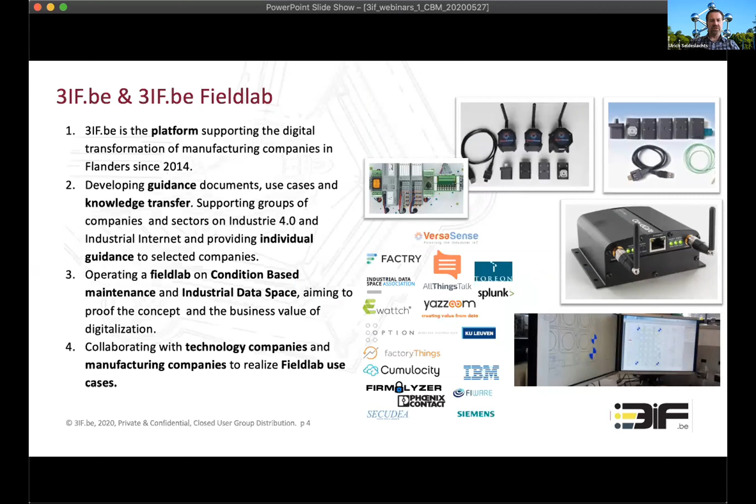The field lab is really a case of components that we take into manufacturing companies to showcase what it can really be about. Within 3if, we don't only focus on condition-based maintenance, but for the sake of today's topic, we'll be doing that. So why is condition-based maintenance important?

We are looking to evolve the whole concept of predictive maintenance and maintenance overall around the concept of Industry 4.0 condition-based maintenance. We are using digital technologies to support digital servitization, to reduce the cost of maintenance and ensure there are KPIs related to those.

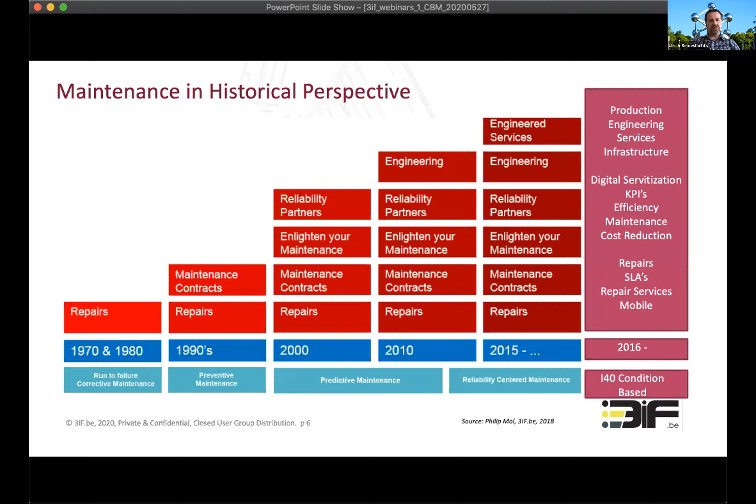We have many different use cases for this that we can show over the next couple of months and weeks. So I'll hand over the word shortly to my colleague Daniel, who's been working together with me on Factory Sense, which uses some similar cases, to briefly explain what we have been doing within Factory Sense. Daniel, I'm going to hand over the word to you.

Good morning to you, by the way. Yes, hello, good morning to everybody. Thanks a lot for participating in this webinar series. I will try to show you a bit of our project.

I will start to share my screen. Hope it works. Okay, I hope that is visible. Yeah, we can see it.

This is a project started from our field lab activity where we tried to put together a few producers of IoT devices, connecting each one to its own IoT platform, to be able to have an overview of what happens at the factory level.

The target for this project is the small and medium-sized company, not only, but the goal was to have something available at an affordable cost to be implemented in real industry.

In the Factory Sense project, we proposed to provide a sensor kit - 10 sensors, one gateway. The gateway is the connection to the cloud, but the 10 sensors can also be an interface connecting the real data from the machines, from existing sensors, to have a look into the cloud and see what happens.

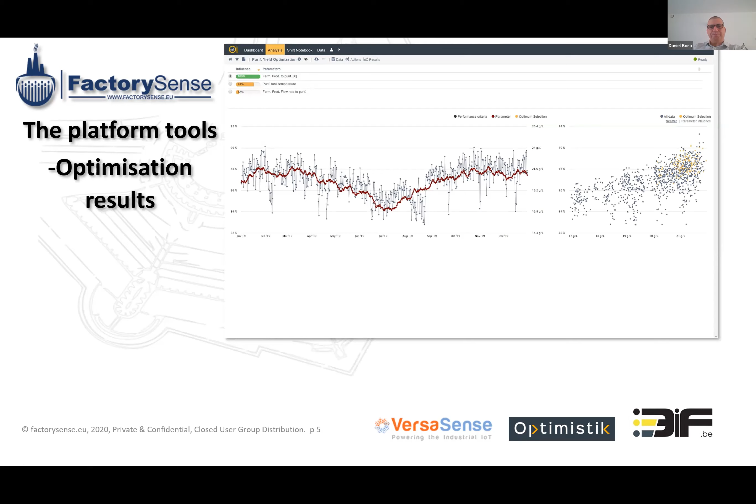So we can rerun the analyze to provide the optimization result. Here is a visualization of the results. Between the data, it's much better here. Between the real data collected, in yellow, we have the best situation, the best settings.

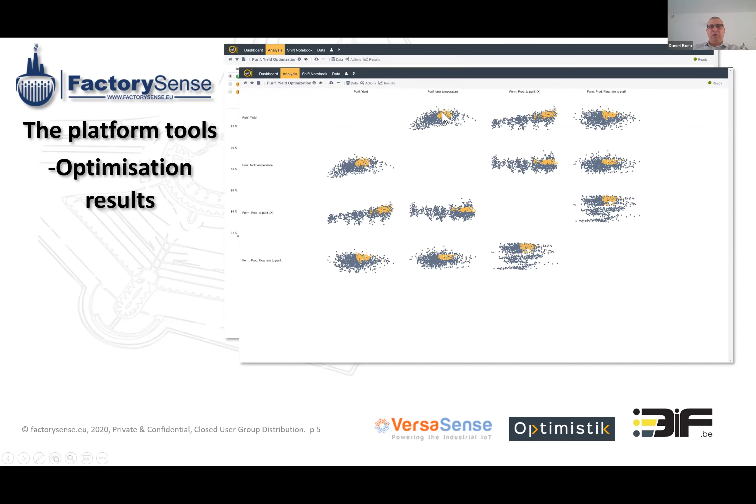And if we go back to the parameters and modify the input parameter, we'll concentrate our output in the best scenario. And another visualization from these tools - I will spend some time here.

It's not related to condition-based maintenance, but it's visible, the variation of some parameters. If here, in place of the tank temperature and concentration in oxygen, we have a vibration or a temperature, we can combine it in only one visualization.

We can combine data from different sensors, and also we can trigger different conditions. Let's say if we have monitored the temperature of the device, probably of a motor, we have some parameters.

We have the motor temperature even in the automation layer. And it's not relevant if my temperature remains at 70 degrees - let's say it's constant, it's okay. But if the increasing time for this temperature is faster than, let's say, a few seconds, that could be an alarm.

In this platform, we can monitor and put together existing sensors, but also we can put calculated sensors to have a relationship between the data coming from the machine.

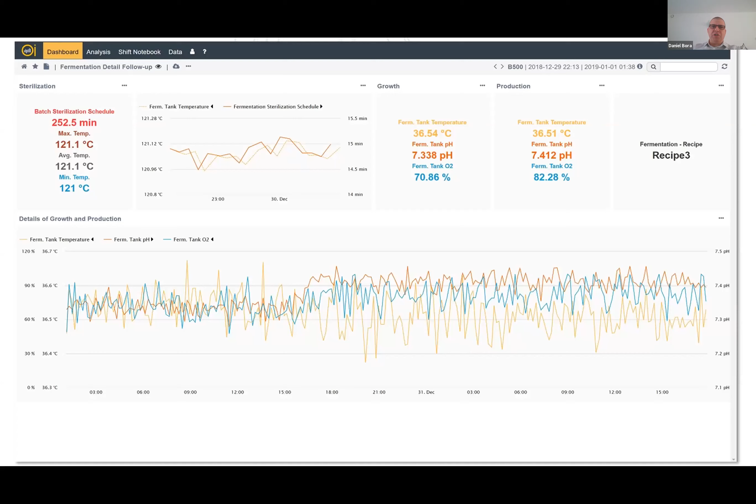I hope that just having this overview will make it easy to see the benefit of using small tools like this sensor kit - non-intrusive, easy to connect directly to the platform - and building dashboards and triggers after that to monitor a machine. This is the first use case, but it extends up to the complete production.

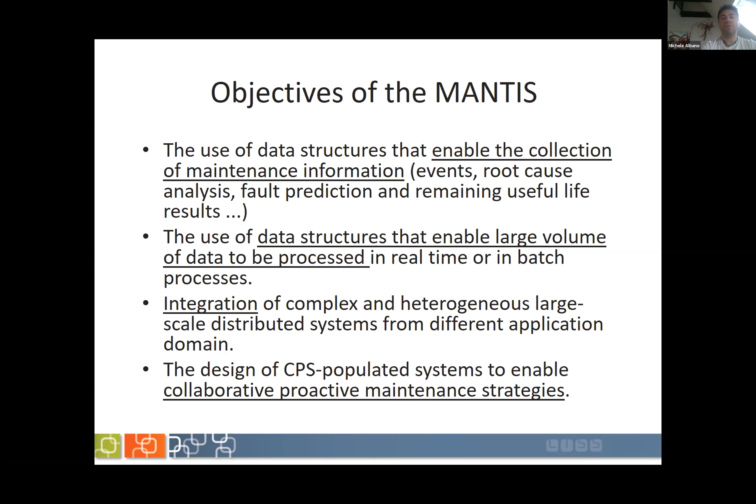And finally, from the lower level, we wanted to have a system populated with cyberphysical systems, so a system of systems that could actually apply techniques to allow for condition-based maintenance and proactive maintenance.

I will not spend too much time on this slide because you are from the field. Anyway, here we define the four kinds of maintenance: run to failure; preventive maintenance with periodic maintenance actions; condition-based maintenance, which is based on data readings to decide when to perform maintenance actions; and proactive maintenance, which builds on all the other ones and leverages a lot of root cause analysis, etc., to improve maintenance actions themselves.

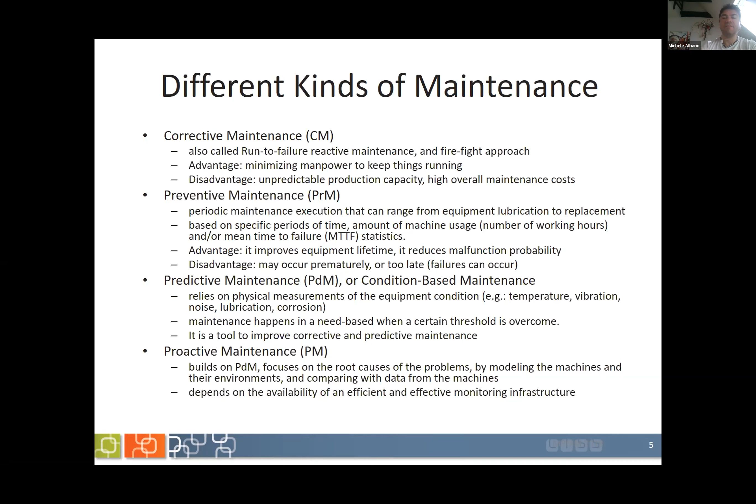Examples of what CBM and proactive maintenance want to be able to do are answering the questions we have here: which machines I should take care of in this moment, where are they located, how can I find them, because maybe I don't need the ID hidden inside the machine—I want some way to recognize the machine in a fast manner. When I should do some actions, and which spare parts do I need or will I need to perform the action, how to perform the maintenance action, and how to do reporting.

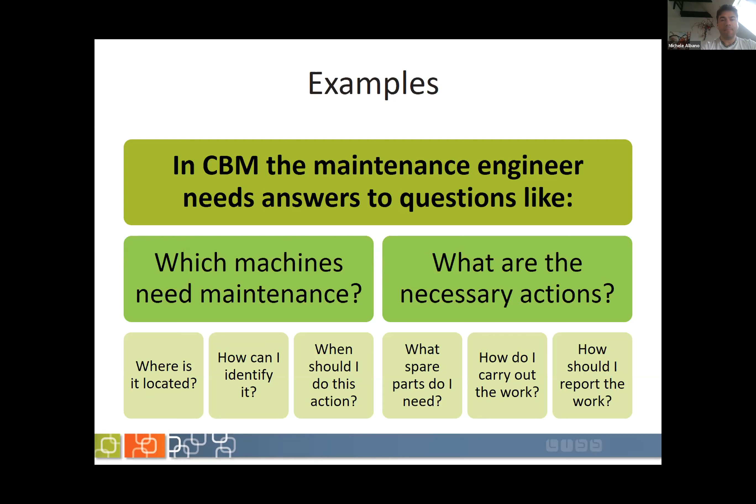The technologies that we used in Mantis came from a number of different worlds. First of all, the sensors: we wanted to be able to employ existing sensors of the machines and new sensors that had to be, at least in part, quite cheap, to be able to power our platform. So, in that sense, we wanted IoT, Internet of Things, and cyberphysical systems to provide the platform, and we also wanted to take care of the 3 Vs of the data: volume, velocity, and variety.

Internet of Things—I believe all of you know what it is. They are embedded systems that are always connected to the internet, so they are able always, or close to always, to exchange data with some place where data is processed. Cyberphysical systems is another term that says this embedded system can have an impact on reality, so it's a bridge between the cyber world and the physical world.

Then the cloud is another component of our platform, because we want to be able to deploy applications in an easy manner. We want elasticity, so we want to be able to scale the power of our computational platform when needed. And also, if you have everything on the cloud, it's easier to maintain the applications themselves, in general, to manage them.

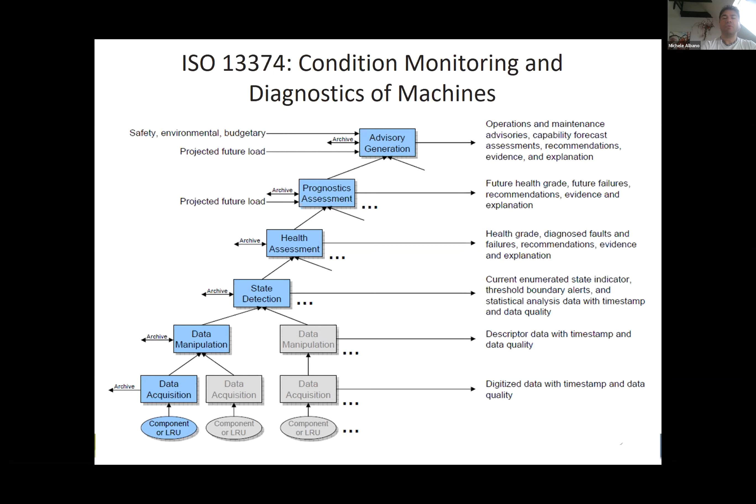Here's another technology to be considered, actually an ISO standard. This standard defines how and where in our system of systems to perform some kind of data processing. For example, on the bottom we have machine data acquisition, then manipulation, etc., up to advisory generation. We applied this vision to our system to find if we were not covering some of the pipeline needed for proactive maintenance and CBM.

Now, the Mantis platform. The idea was to develop a framework for proactive maintenance. Actually, it was mainly CBM. Some of the pilots were able to do some kind of root cause analysis, but it was not that easy. We'll get back to the motivation in a few slides.

So we had a mix of 4 main technology families. One in the factory, for real-time sensor data acquisition. Then we wanted a middleware that was fast and high-performant to connect the factory to the cloud. Then on the cloud, we wanted to be able to do data analysis and support decision-making. We also wanted to do some preliminary data analysis in the factory. Finally, we wanted an HMI, a human-machine interface, because having just the data is not enough for an engineer to understand what's happening. We want to show the data and the output of the data analysis in a smart manner.

Here you can see the 3 tiers of our architecture. One on the edge, in the factory. Then we had a platform tier on the cloud, where other business logic was implemented. And finally, an enterprise tier, which is mainly close to the customer. Let's go through them one at a time.

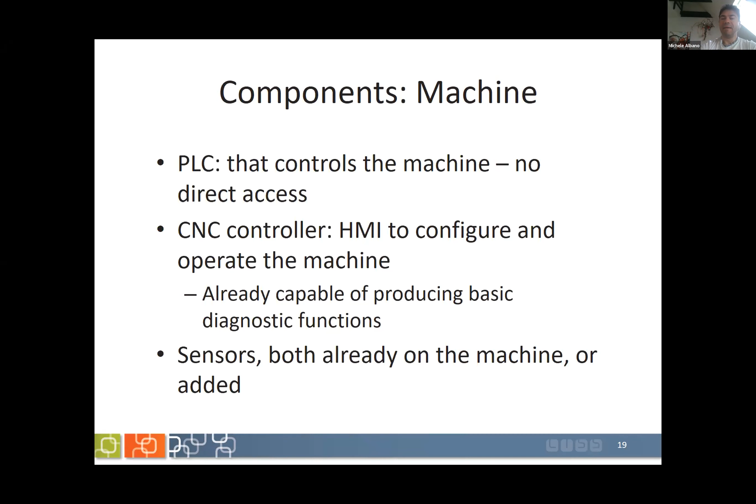And then we had data analysis and human-machine interfaces. On the machine, we had PLCs, CNC. We had all those kind of elements integrated in this component. So the idea was to integrate what the CNC could tell us regarding what's happening, to integrate the sensors that are talking already to the PLCs with the new sensors, to collect all the data that can be useful for the maintenance of the machine.

The local middleware had to be fast enough and reliable enough, but not too much. The idea was to have something that was not so computationally expensive, that can be executed in not so powerful computers, but that was still able to interact with the protocols of the machines. For example, OPC-UA, if the machine allows for OPC-UA, maybe Bluetooth to be able to connect to the new sensors of the machine, etc.

Now, edge local. Here we have, let's say, a mini cloud, a small number of computers, maybe just one computer, to do the preprocessing and pre-visualization of the data. This edge local had both to provide those capabilities to the user, to the local user in the factory, and also it had to be the only element that is contacting the internet.

So we wanted to protect everything inside the factory and have just one computer or one set of computers that had to be protected from the usual problems you can see from the internet, cyber attacks, etc. And it had also to perform some kind of caching of the data, processing, and then to contact the real communication middleware.

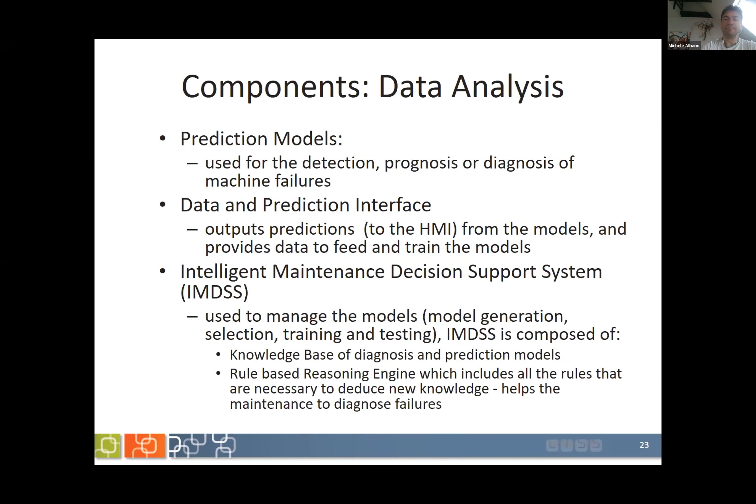Now, why PM was complicated? How can you do root cause analysis and find out the problem of a fault if your platform is not going to see many faults? In fact, errors in machines are extremely rare. Sometimes you have one fault every 150 days, sometimes even every 500 days.

So we were able to do some analysis of the normal behavior of the machines, but we didn't have many errors and many faults to train what we were building. Still, we were able to provide a knowledge base of normal behavior to find outliers. As you can see, we had to move from proactive maintenance to condition-based maintenance, because it was not so easy, for example, to compute the remaining useful lifetime if I don't see the end of lifetimes to train my systems.

And finally, the HMI, the last component. Here we want to be able, as we said, to provide the data, to show it in a smart manner, because maybe you have 10 gigabytes of data and you want to show just one graph to the user. We had to let the user identify the interesting information, for example, highlighting the graph when we are having outliers. And so it was also an important component of the Mantis.

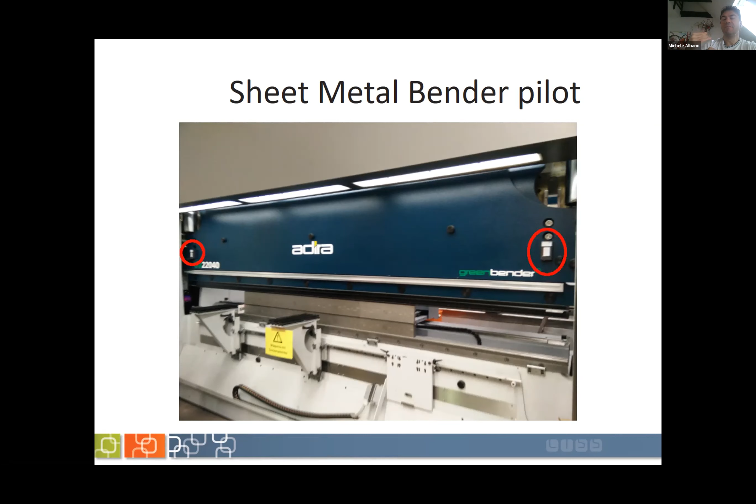So we said this machine is a press brake. It had a blade that was getting on the metal sheet and deforming it with very high precision. For this reason, the behavior of the machine was very precise, and that's why we were able to do something with the accelerometer, because the machine was going to perform the deformation of the metal sheet exactly the same manner always.

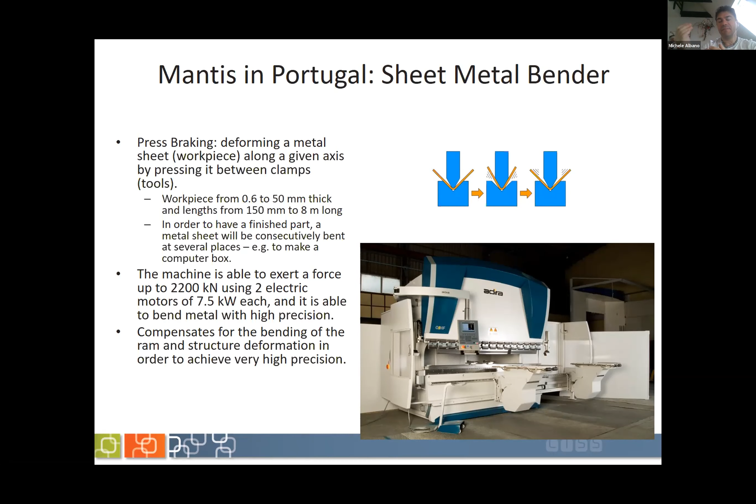Okay, one more pilot, a press machine. This time it's something huge, you can see the size from the picture. Here we are scaling up around 10 times regarding the force of the machine, and it was a press machine, so it was going to stamp with very strong hits some material.

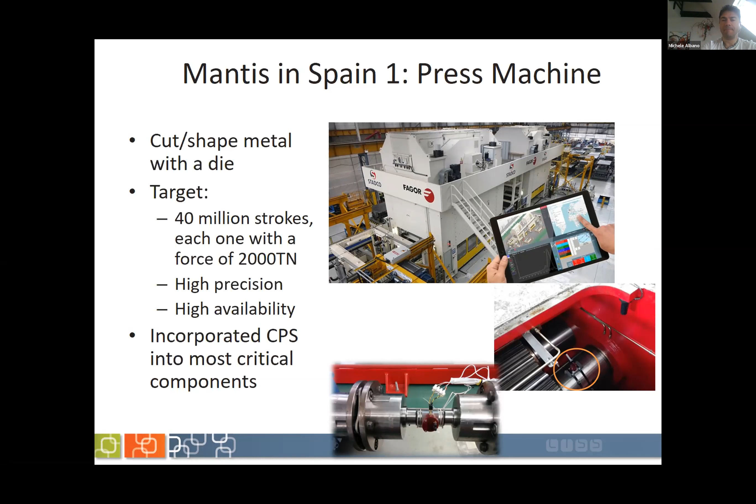Here we decided to build new sensors, not use existing sensor machines, not only using normal sensors such as accelerometers, but actually build something to integrate into the components of the machine. Here you can see the visual of the machine itself, and all the CPS, cyberphysical systems, we integrated into different parts of the machine.

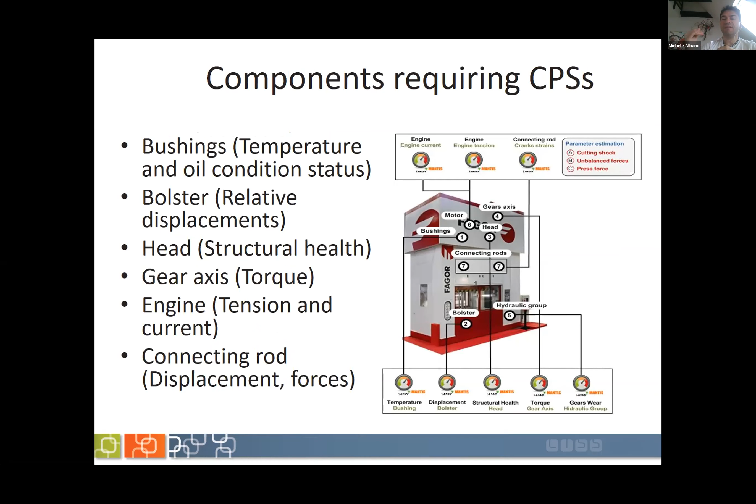Now one more pilot, also in Spain, pultrusion. It's a way to take fibers, for example glass fibers or natural fibers, and impregnate them with resin to create a very strong material with very good chemical resistance and electrical and thermal insulation. This material, for example, is used for the waterproofing of the Pajares tunnel in Asturias.

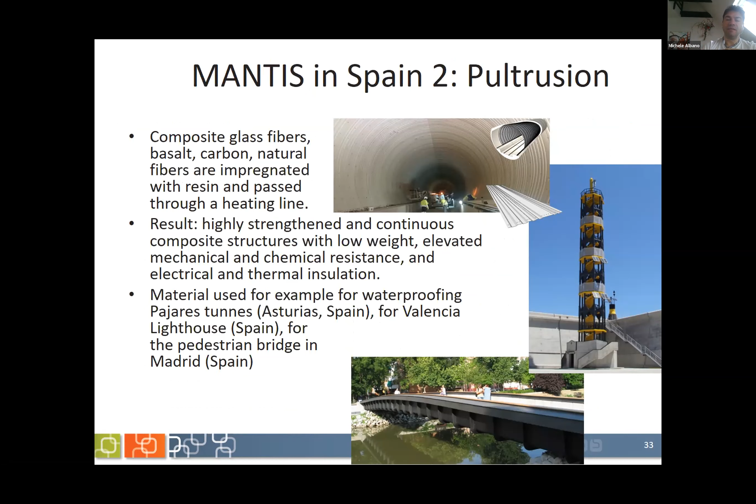As you can see here, we are not talking now about a machine, but about a shop floor, a long machine that must be perfect in terms of temperature, etc. Because in pultrusion, if the resin used to impregnate the fiber is too hot, you will burn the fiber; if it's too cold, the process will not be complete. Here we had to collect data about the whole shop floor, temperature, humidity, air extraction capacity, and from the machine itself, internal temperature, oil tank pressure, etc.

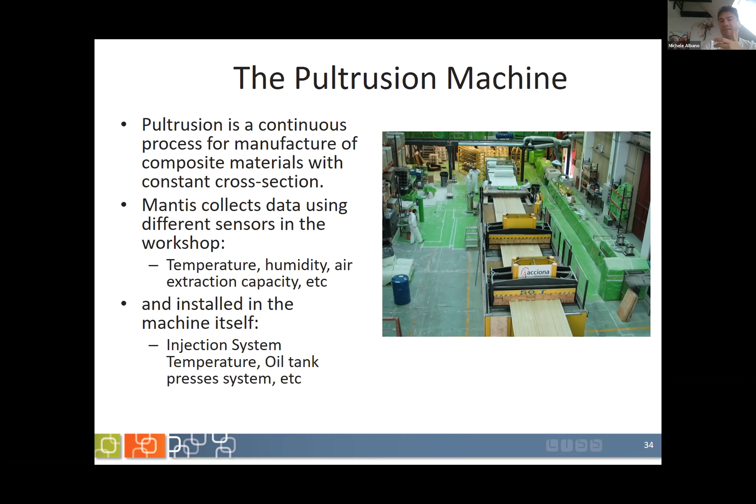And finally, the last pilot: here we have medical devices. So we are talking about much smaller and cheaper machines that must be kept in perfect condition, because this time, every time there is a problem, a patient either will not be diagnosed or will die.

There is the problem that we had to find an issue in advance, because it was not possible for the hospitals buying those machines to do redundancy. It was too expensive for them to buy multiple machines, and it was also impossible to move the patient to another hospital having that machine if the machine broke down.

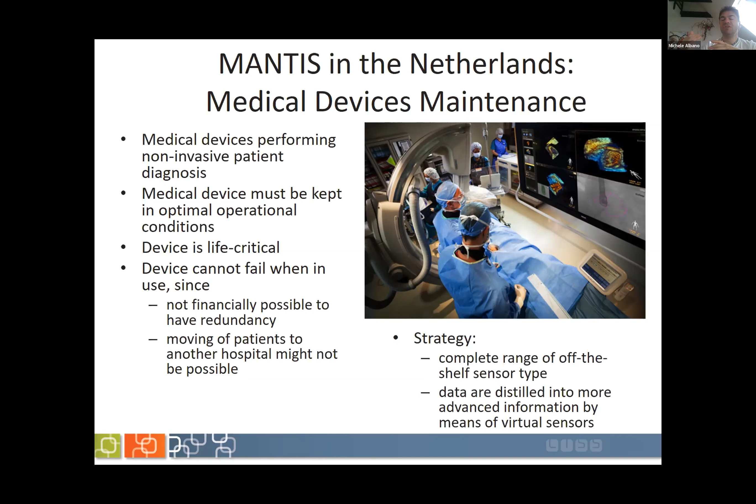So we had to be able to find in advance what was going to happen while keeping the monitoring platform cheap enough. And here you can see this system, this e-alert controller, which was connected with the machine, getting data from the sensor of the machine, and which was going to preprocess the data and allow for the visualization.

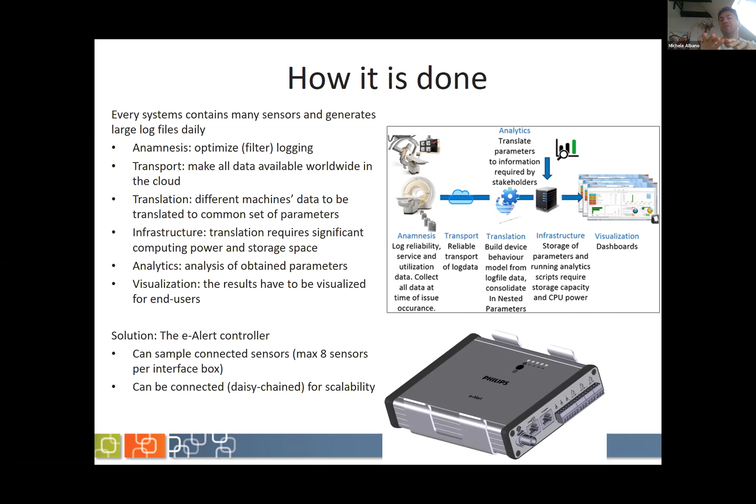Here you can see in particular quite a detailed list of what the small device was doing: filtering the data, putting them in a format that is comparable with other machines of different families, but with different functions, etc. And finally, here you see the e-alert controller software.

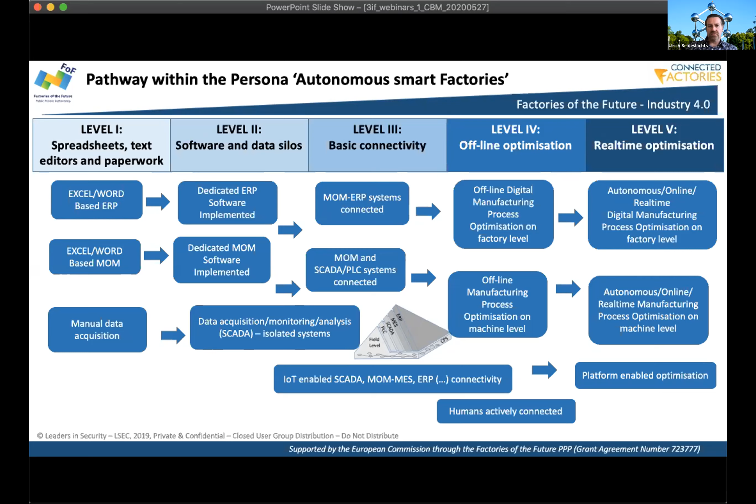I can also share a couple of thoughts. Every Tuesday at noon we organize our industrial cybersecurity events. Yesterday we had one, and the webinar has been recorded and put online - we had a session with Microsoft, but we've had a couple of other sessions too. The next one will be on ransomware. I invite you to take a look into how security should be applied in industrial cases, where there's an opportunity for integrating security on the edge, in the middle, and toward the end, getting an end-to-end security perspective.

When we consider integrating JSON over REST, and also over MQ, we also need to take into consideration how to connect to identity and access management. So I welcome you to consider the different identity and access management activities we run. And finally, when we talk about the future, 5G is definitely important. Next week's session is also with Koen, where we'll detail some of the 5G use cases for industry and for maintenance already being utilized in Asia Pacific. There's definitely a lot to learn on how we can continue using cyberphysical systems in that respect.